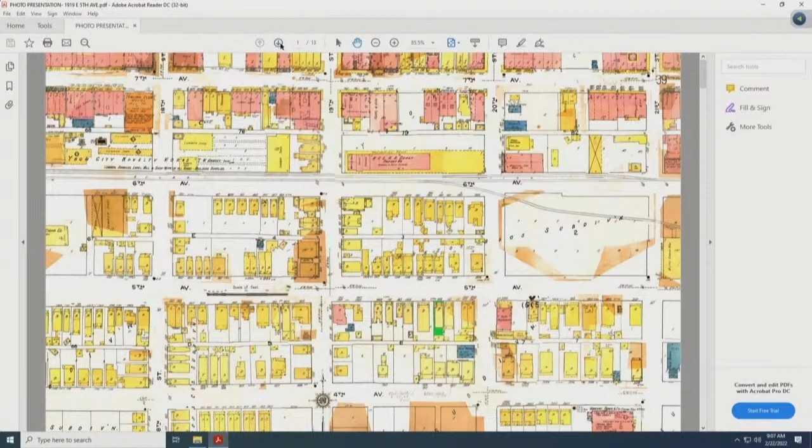This is the vicinity map showing the area in question. It's speckled through with contributing structures, non-contributing structures, and vacant parcels. This is the property in question, and to the west they have a tract of land that will be developed shortly.

This is looking from above. As I indicated, there are some vacant parcels to the west. This is the property in question, facing Fifth Avenue between 19th and 20th Street, with the alley that runs east and west behind the subject site.

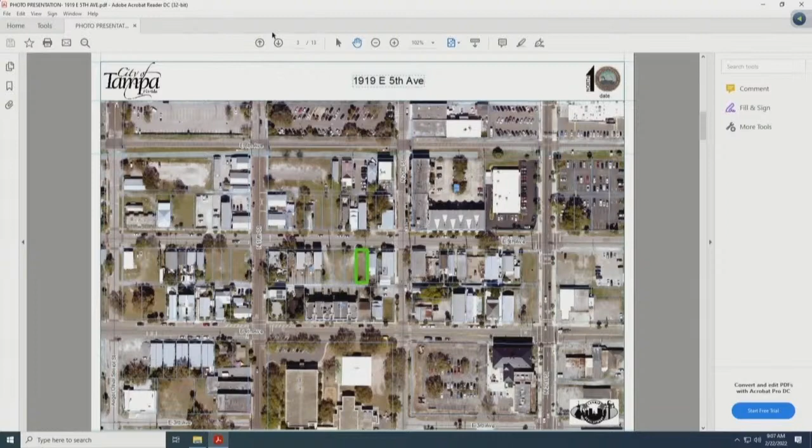This is looking back at the parcel itself. To the east you have this contributing structure. We use this as a reference point for setback from the property line, visually from the back of the sidewalk, and then elevation from grade as well.

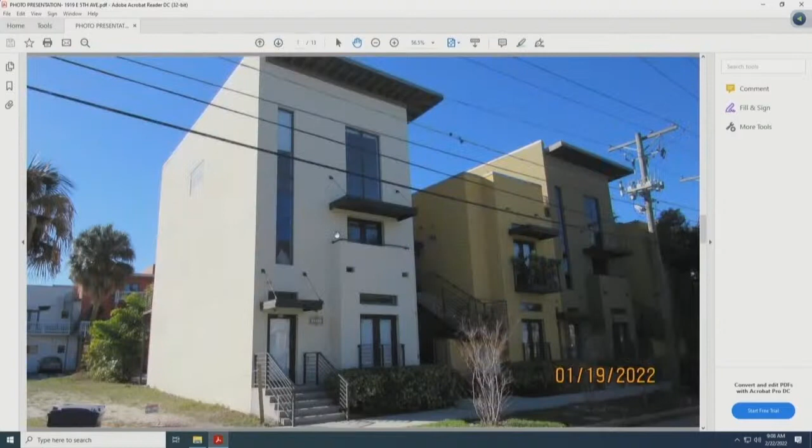This is just showing the subject site and the raw land. This is looking to the west, some new construction that's come in front of this board and has been approved. Look at the volume here and the massing, and the setback and elevation from grade as well as a reference point.

This is looking at a street shot. There's some parallel parking to ease some of the parking challenges in this urban environment. And turning around looking down Fifth, this is to the west, down Fifth Avenue towards 19th Street.

Directly across the street, and this is across the street as well. You have some non-contributing structures, this one here and this one here, and this will be your last case you're going to see today, but this was new construction behind this tree. And this is a period home, contributing. Once again, we'll use this for setback and elevation from grade as the project moves forward.

This is looking at the condition of the alley, towards the east and towards the west. That concludes the photo presentation.

At this time, the agent and the owners could approach the podium and begin their presentation.

Thank you. Good morning. My name is Joseph Ferraro. This is my girlfriend, Mackenzie McNamara. We are the owners of the lot at 1919 East Fifth Avenue. Frank Borgano is our agent. We're going to go ahead and present our plans. Mackenzie's going to do most of the talking—she's the most charming out of the three of us, so go ahead, Mackenzie. Okay.

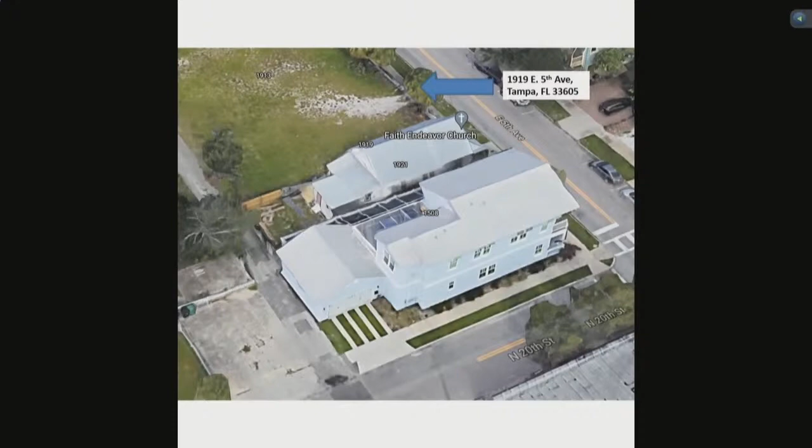Next we'll go to the site plans. So Frank, I'll let you talk. Well, this one just pretty much shows the lot line with drainage. So we will be addressing drainage issues when we amass the construction drawings.

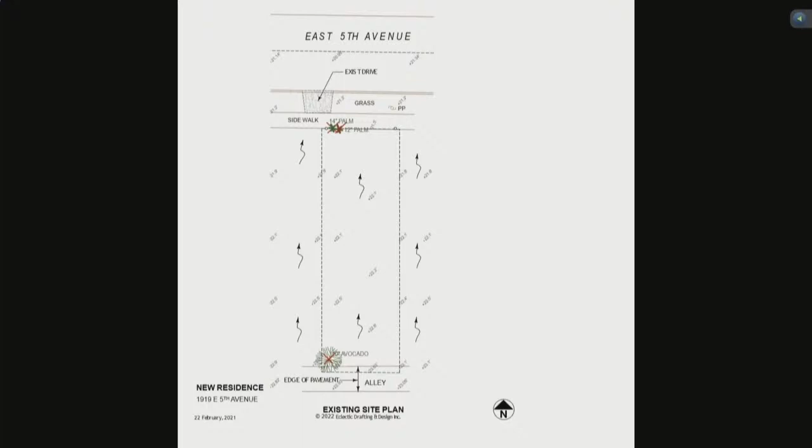This is the actual plot showing the house, and we have 2 feet from each—the body of the house is 2 feet from the lot line, and we have a 1-foot overhang. See the 2-car garage; behind the garage there will be a cement slab.

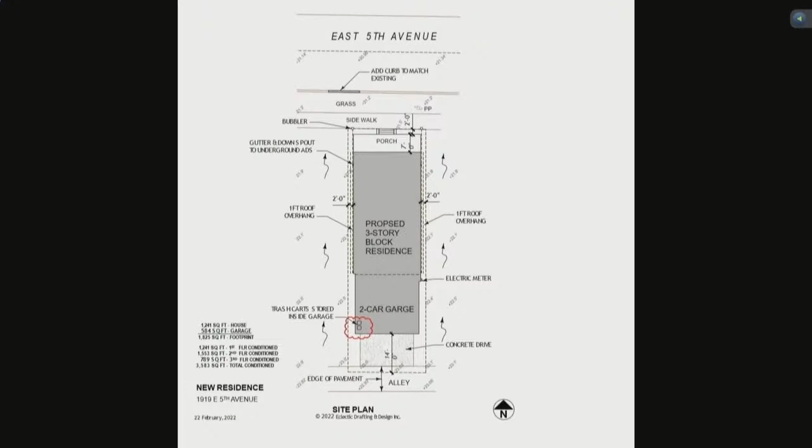This is Chris's house, on the corner, which I'm going to call the Wojewicz house. We were also the general contractors on that project. You'll see when we get to the elevation of that house, from an architectural standpoint, we're going to mimic that house.

Block construction, hardy board siding, same windows, same trim, same roof, same fascia, same open eaves, same exact front porch, all the dimensions the same, exactly the same overhang and dimensions from the lot. So we're not trying to create something different. We're going to mimic all of that because we already know that's been approved by you guys in the past.

This is back to our house, so now we're back to the house in question here. This is just to show you, once again, the interior. I know that's not really what's up for questioning here, but just as an example.

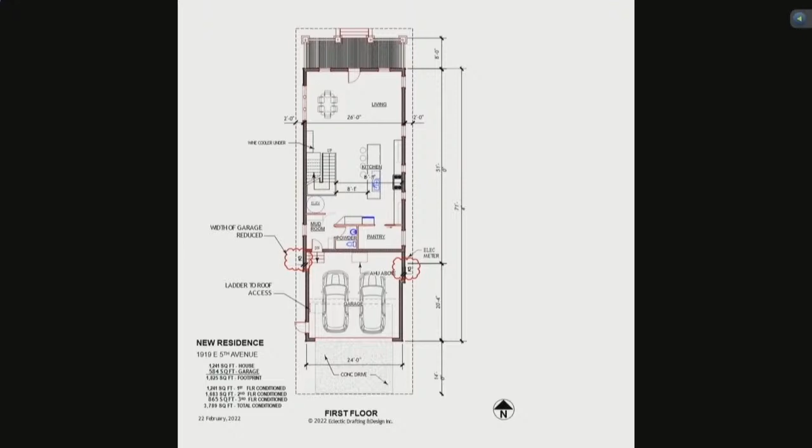One of the biggest concerns, or questions that were posed, were in regards to massing. We had basically a very, very long structure. We tried to, from an aesthetic standpoint, minimize that look, change that look. So we basically shrunk the garage in so that you didn't have such a long look going all the way down.

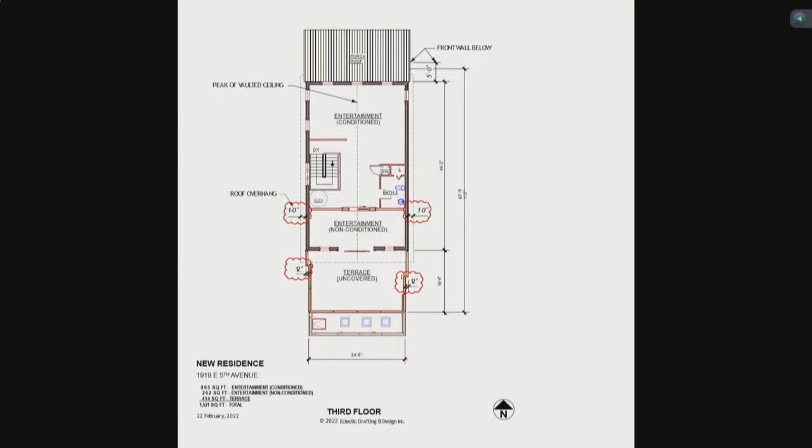This is the third, same thing in regards to massing. It is a 3-story structure. When you looked at it from the front, you basically saw a very large 3-story structure, straight up. So with the help of Ron, we came up with an idea to do 1st story, 2nd story, and then bring the 3rd story in 5 feet so you didn't have that elongated look in the front.

And here you can see, I better look at that, see how that front is actually pushed in 5 feet.

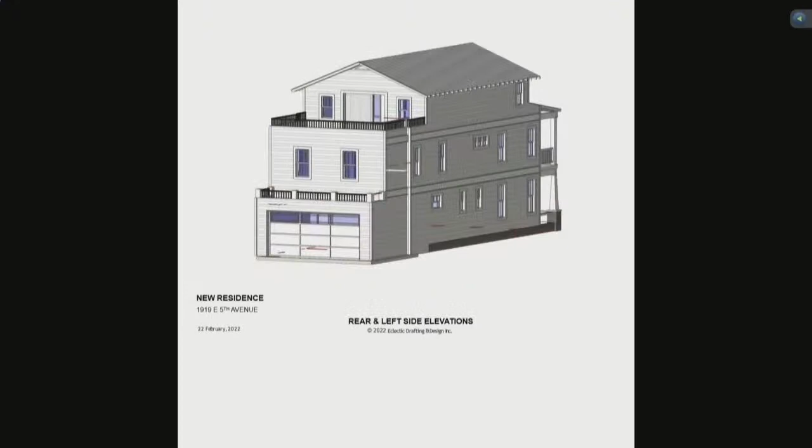Another look, this is from the rear, and you can see where the back end we brought in to give it a different look.

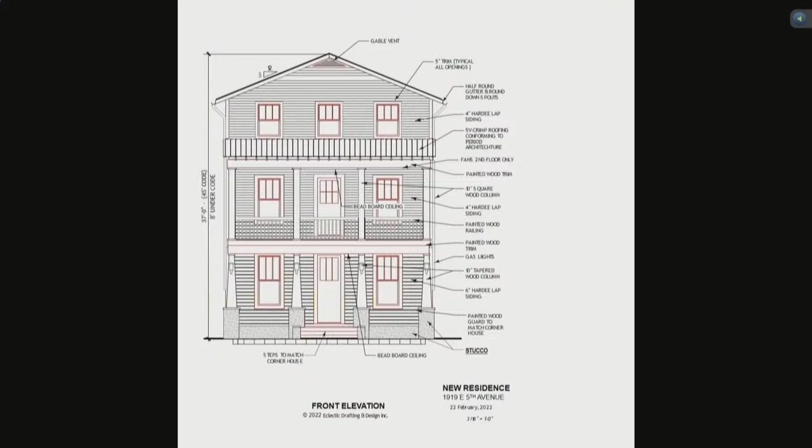And this gives you a side view, and you can see where we've tried to cut it up a little, basically, so you didn't have such a massive, unaesthetically looking building.

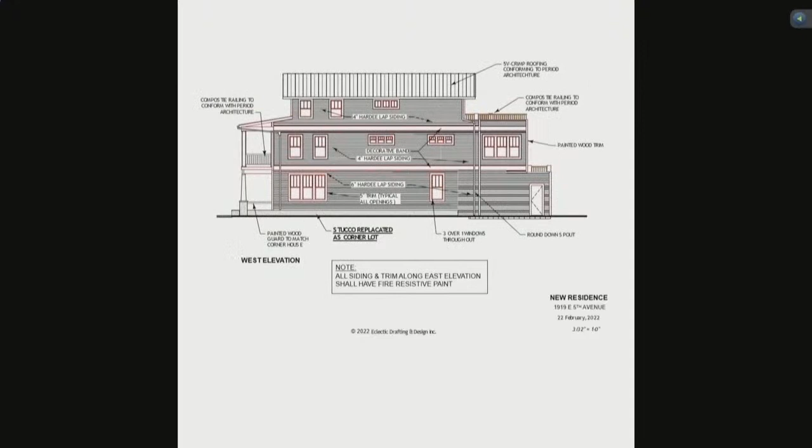Same thing, other side. This is the rear. And you can see the construction here.

Now, we know we're all the way to the zero lot line, and we know that one day the church next door will probably be gone and there will be another house. So we have a construction that we tried to make as fireproof as possible. We've got block, we've got Hardee board siding, we're going to be using fire retardant paint, same that we use in the Wojciech's house. So we tried to address that issue as well.

This shows you the front and how we, once again, brought the front in 5 feet to address the massing issue.

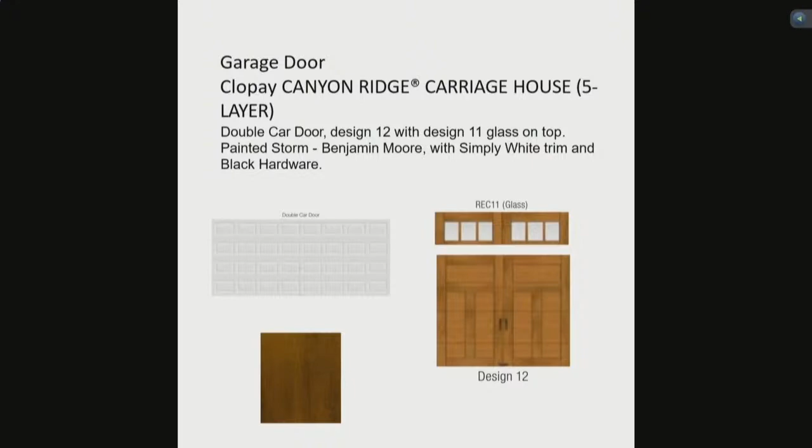Does that conclude your presentation? Yes. Okay, Mr. Vila? Good morning, Commissioners. Ron Vila, staff with Historic Preservation.

Staff's finding is that the application submitted on the 29th of January was inconsistent with the Ybor City Design Guidelines. Initially, when Joe and his team came forward, we looked at the massing—the vernacular they chose, more of a craftsman style, leads to a 2-story volume.

He added a third story there, so we talked about setting that front facade third story back. Initially, it was all in the same plane. The plans I reviewed had a 1-foot setback, and then this morning—this is the first time I saw it too—they pushed it back, I believe, 5 feet. So they're working with us to break that massing down.

So from the street perspective, the volume you engage with is more of a 2-story. Right now there's raw land to the west; we have some applications coming forward where empty parcels will be built up, so the view from the side will be somewhat obscured in the future. But they are working to break down the massing. Our main concern, why they received the inconsistent review, was because of the massing being in the same plane. That has been addressed this morning.

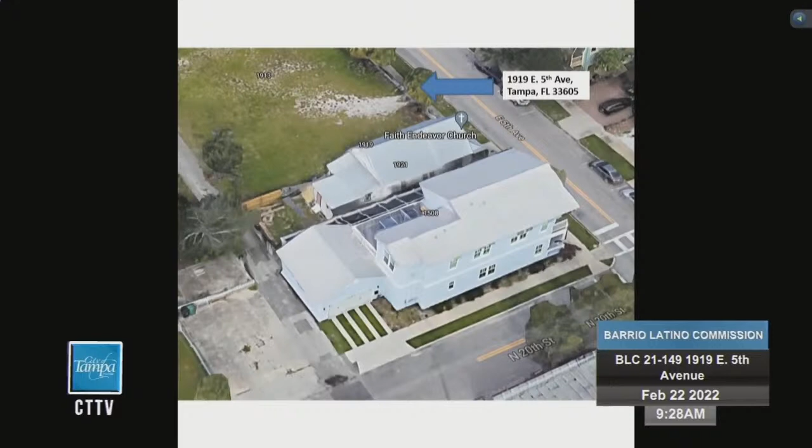You want the actual photos, not the plan, correct? Yeah, so since you're mimicking the materials, we can just go through the existing house and talk through all the materials. Okay, there. Oh, sorry. We'll get there.

Okay, so let's start from the top, work our way down. The top, the roof portion, is a metal 5V-crimp roof. Then as we work our way down, let's start with the actual skeleton. It's a block structure that has been furred out, and then we've added Hardee board siding, smooth.

The trim on the windows is a 1x6 trim, and we made it consistent with what the neighborhood bore back in the day. Open eaves, once again consistent with the neighborhood as it bore back in the day.

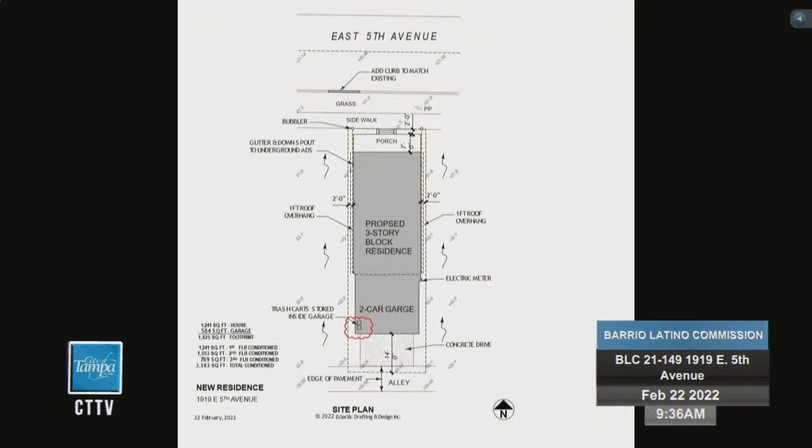And what's your finished floor height? Those are staff comments that you discussed with them in the future. I don't see any information on that. Well, on this particular drawing, it doesn't show. You're basically wanting the difference between the porch to the sidewalk, is that what you're asking? Yeah.

Yeah, so basically what you're saying is make sure we put that on the actual drawing. Well, I mean, you have a nice presentation, but there's a lot of specific information that we're looking for in order to position the house appropriately on the site, and that documentation is lacking. You've shown us an adjacent project and say it's going to match exactly, but we don't know what that really means. So I get the design intent of what you're trying to do, but we're making a lot of assumptions here, you're asking for approval from this board on assumptions and pictures that it's going to look like this, but we need to know what that is.

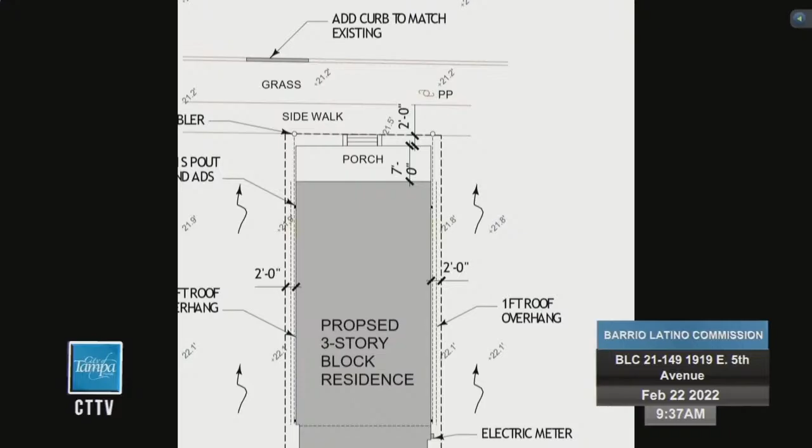Hang on, Chris's house should have it. What's your finished floor height, do we know what it is? Can you check? Hard to see, I think it says 12 inches.

Sorry, we're trying to pull up the plans from the house in the corner. I mean, on our monitor, we can see the Voidovich house, so it's got, I can see a finished floor elevation. Are you entering into the record that you're going to match that finished floor elevation? But that's only the porch shown there, and I don't know if I can make out any setback. So these are important details that we're trying to get a better handle on here.

So, no. I can't, I don't want to just make up a figure.

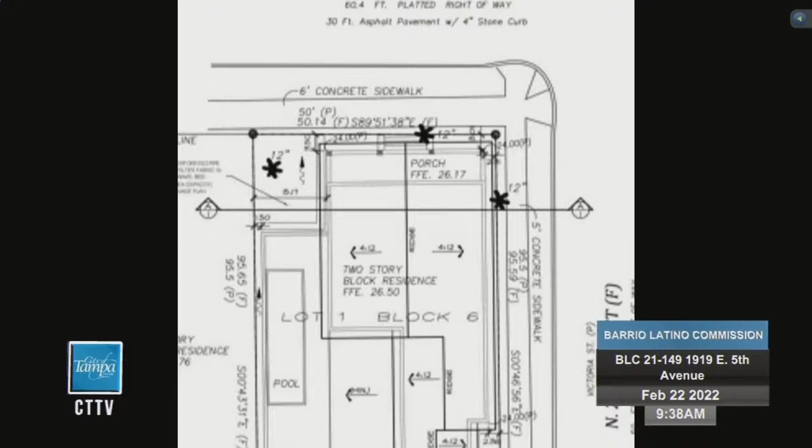I can take an educated assumption here that basically, we're 7 foot away on the porch, or the porch is 7 foot. Then we have the stairway, so it looks like from the property line there's 2 feet sidewalk. So are you wanting from the sidewalk, or are you wanting?

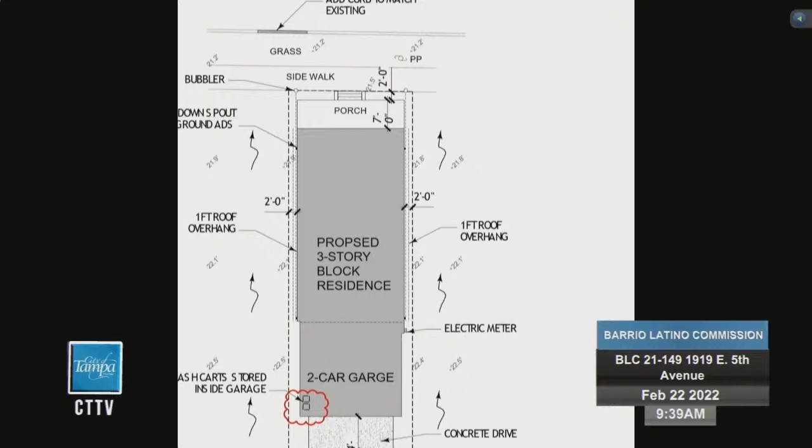I need to know what the historic precedent is for how you're positioning your house on the site. Let me see if there's any other ones. So if there's other historic homes, you're trying to mimic a historic home, you need to know how far that is from the street. And usually, and I think that goes back to staff comments.

We made it very simple. We just mimicked the other house that we did. Ron, is that enough information for you, or?

In the past, that information was presented to staff. They show the historic fabric within that block. They have a structure that's a contributing structure to the east. It's very easy to provide that information to us. And then they do have the house that they continue to reference.

It's not a historic home, but that pattern was established, and the historic pattern was established, and then in the discussion to approve that structure, the setback was consistent. Then across the street, there is some historic fabric as well. It is reduced. As I tried to allude, the zoning is YC7, which is 0, but the historic pattern would take precedent over that. So those numbers should be delegated or presented to staff so we could have whatever that averaging is. They should be in line with the fabric established in the immediate vicinity.

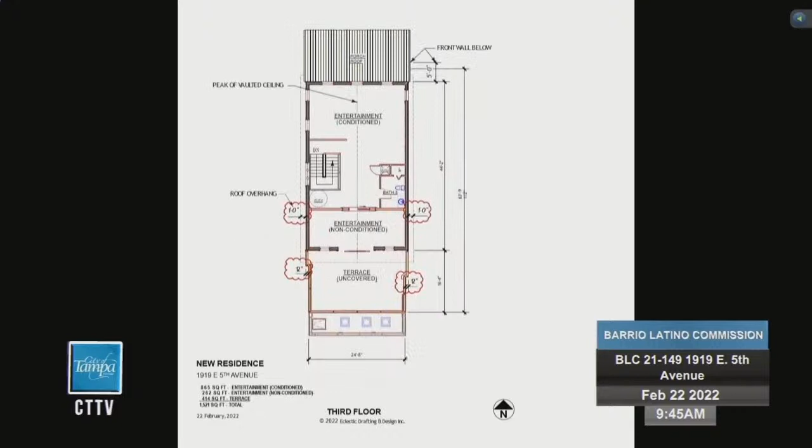Yeah, you know, that kind of bothers me. You're making a slight move there and they're uneven. You'll have houses on both sides of you, but I don't understand the justification for that. Is that to try to get a little more setback back there, or what's the reason it's uneven? It's because of the second floor, how the walls work for a bathroom and for a laundry room.

Pull up the second floor picture. We don't have it in the presentation. I could go into my email and get the second floor if that helps. I mean, why even make that move? If you're just setting back that wall, is it because you're concerned about the setbacks and the side yard setbacks, or is it purely a space issue?

Oh, no, that was a recommendation from Ron to move in the garage, shrinking that part. The reason why we did that was because when you looked from the side, we were advised that it would be better to kind of break it up, give it a little bit of a reveal from an architectural standpoint.

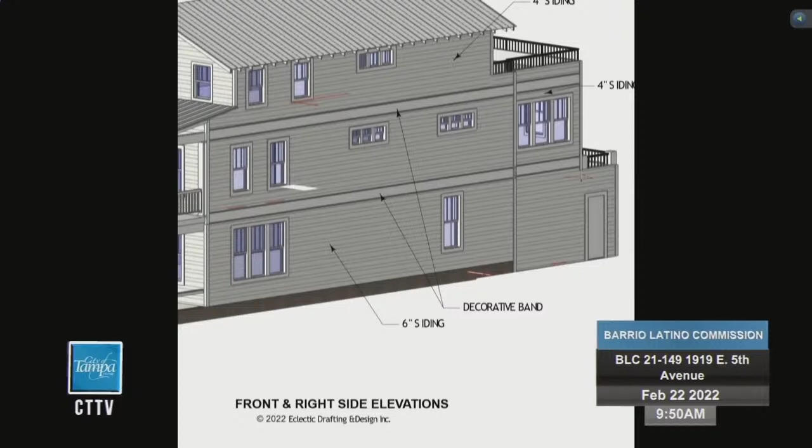Yeah, I guess it kind of, this part right here where it transitions to the garage, that break needs to happen right here. Because then you differentiate what the house is. I can't point up there, but your break line from the house to the garage needs to happen where the third story ends. That's a good transition right there.

It's like you're making that jog on the side, just puts it back 2 feet, 3 feet, whatever it is, where that really needs to happen at the end of the third story. Okay, so make sure I understand what you're saying. I think I do.

So what you would rather is that, in respect to the back, just to kick the third story out to where it is one definitive line, correct? Is that what you— Or bring that break back in under the third story. I don't think we can do that.

We can do the third floor though. Yeah, move the third. We can move the whole thing back? No, just this part? Yeah, yeah. We can take the back of it and just kick it back, whatever footage it is, 3 feet, 4 feet, whatever it is. So I see what you're saying, yeah.

Are you gonna take the whole third story and shift it back to that break line? No, you're just gonna take that back and shift it back, just elongate it.

Yeah, because I think you're looking at your two different forms, and you're asking us to consider the massing here, and it adds another form to the massing that I think we're trying to simplify and make a little bit more consistent.

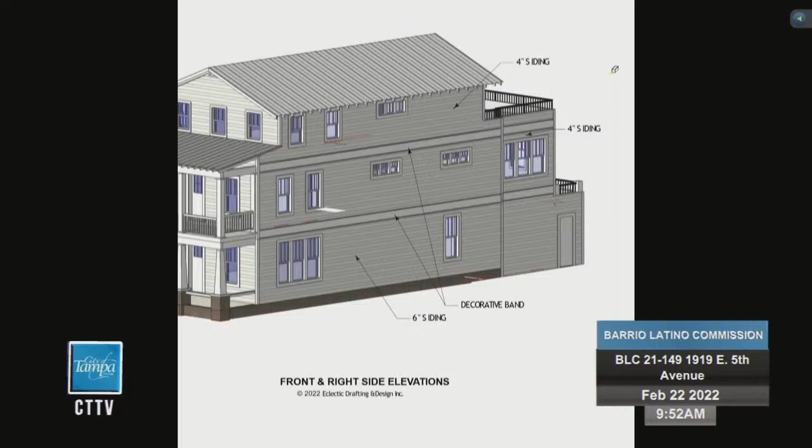I think the gesture of the 5 foot setback of the third floor—I think 5 foot's decent, it's better than the foot that they showed before. Maybe it should be another couple feet, but 5 feet, I think that's what you've talked with staff, so I think everything's good with that.

But if we can align that in your side yard setback, it does a number of things for you. It aligns your gutters, it brings all your trim back in, and it differentiates—you have your garage separate from the house, and then your screen porch or enclosed garden area, bring that back in. That might give you a little bit more room for your AC units there. So I think it's more about trying to make this a cohesive whole.

I agree. Thank you. I agree. Yeah.

Okay, can we go to the other view? I'm okay with the trim boards here for the sides. Mr. Vila, the garage doors—I think the Voidovich house garage doors have the decorative latches on it, which I think was kind of an issue. You don't typically see that in a historic district.

They've shown us some cut sheets of their proposed garage doors. Is there a staff opinion on the garage doors? The direction of the board in the past is that the door is simplified off the alley and that it would have some kind of glazing to break it up.

The transition from the alley to the vehicular entrance was reviewed by transportation, and the setback is consistent with the technical manual. I don't know if there's going to be any fencing, if they want to discuss fencing coming off the alley, or if that will be viewed. No fencing.

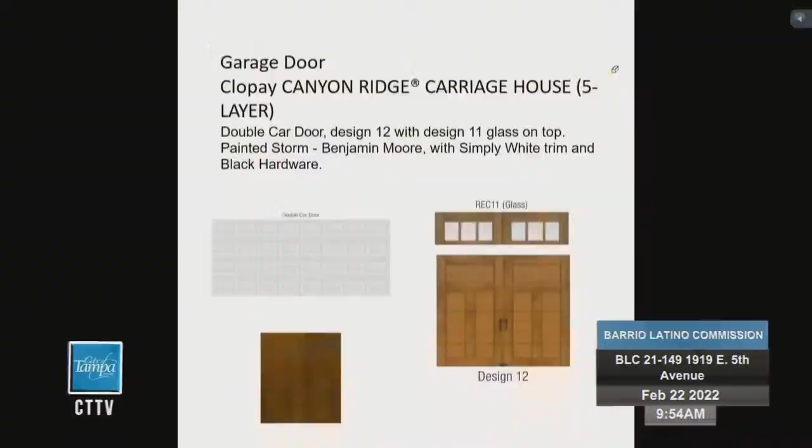It's all the way at the end. Sorry, okay. So this shows it's just a double car door, and it's going to be the same color, more the panelized one on the right, yes, with the windows at the top, smaller windows, as long as it's not a typical suburban type of garage door.

It's going to be in white. Yes, I believe so. So it'll be white as well.

Okay, could you go back a couple slides. I'm gonna go back to the plans. Okay, sorry, wish there was an easier way. Okay, yeah, wall sections.

What's your transition? You're gonna do stucco at the retaining wall, at the stem wall? So then that'll match your stucco on the front porch, your whole entry is all stucco. Okay, basically stem wall, fill, slab, and then can we go to the other section?

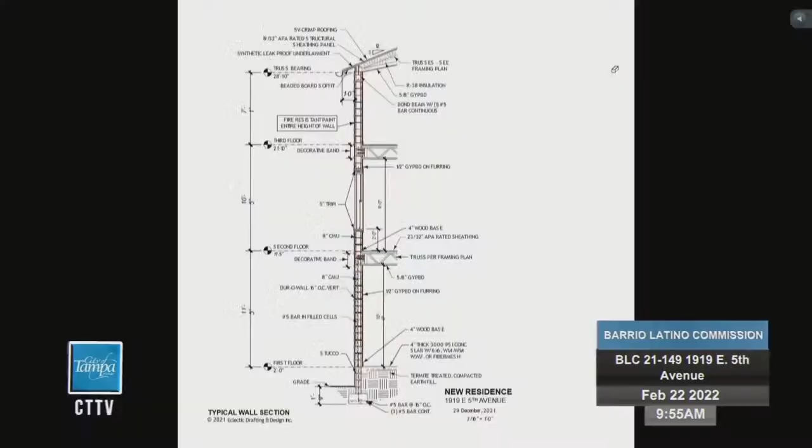So how are you gonna, I think I saw some detail on this where that decorative trim is gonna follow your finished floors, right? So what's your side treatment for this roofing? Maybe the side elevation or model may be a little bit better, I thought I saw. Is it, you're just gonna continue the cladding into there, trim out the sides?

Show me where he's pointing. I can't hear him. On the first floor? Nope, on the second to third floor roof, the shed roof up front. We are actually keeping that, we were proposing to keep this open, correct? Correct. Can you point to it with your mouse? I don't know if that works on this.

You're talking about the second story roof. The shed roof on the front. Right, over the porch. That's gonna be open? You're talking about the side? Yep, which is gonna be left open. Okay, yeah.

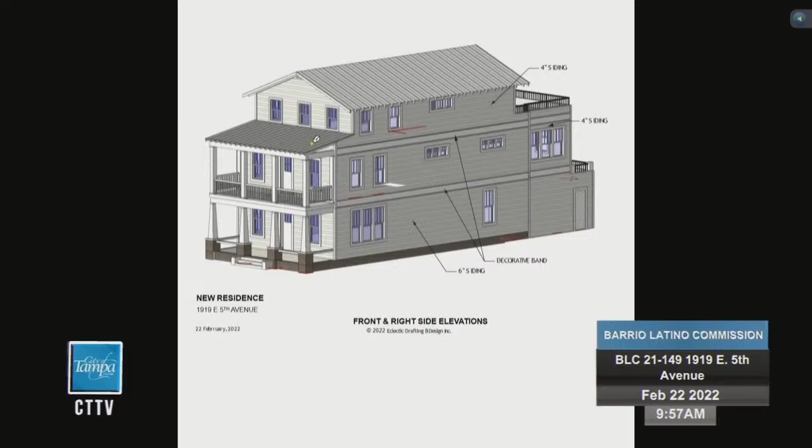Go back to your elevations for a second, I'll wrap this up. One more. So that, yeah, that kind of shows it as open, so you stop the Hardee trim there. Okay.

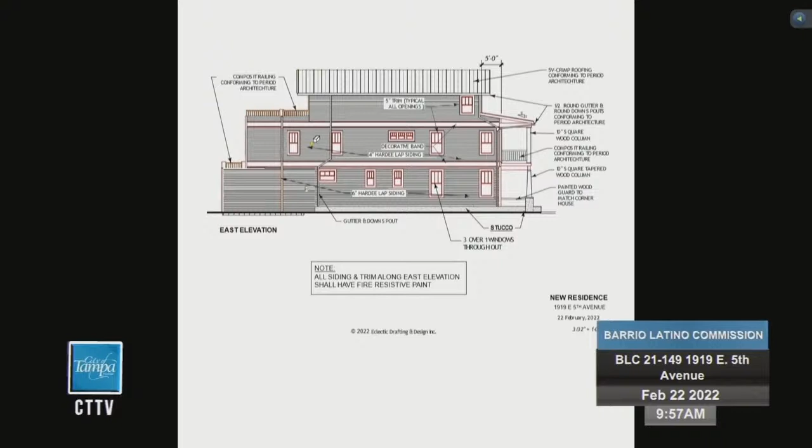Thank you. All right, you've got a few minutes before we close the public hearing. If you want to summarize, I think we've made some suggestions. If you're into some of the changes that we talked about, if you're open to that, but we're going to ask you for final confirmation of any changes to the project before a motion.

Wait, hold on, Ms. Welch, did you have any questions? No. Okay, okay.

So yes, we're open to all the changes. We're going to implement the changes. We actually like the change of moving the third story back. That's a great change for us. We're open to all of those.

Okay, any other comments? No, we're both very excited, we're in Ybor now. We appreciate the area currently as well as what it's gonna be. So we're both very excited. Thank you all for your time.

Great, okay, we're going to go ahead and close the public hearing. We can now discuss the case amongst ourselves. Mr. Perez?

Perez, can you please turn on your microphone? Thank you. I think my biggest concern is the front elevation and the three windows. They showed all these three-story with a loft on the top. I think they should try to do something similar, maybe just one big window in the center or something, try to mimic that, maybe lower it more, just to look like some of the samples they were showing, because just reading as a three-story, I don't know.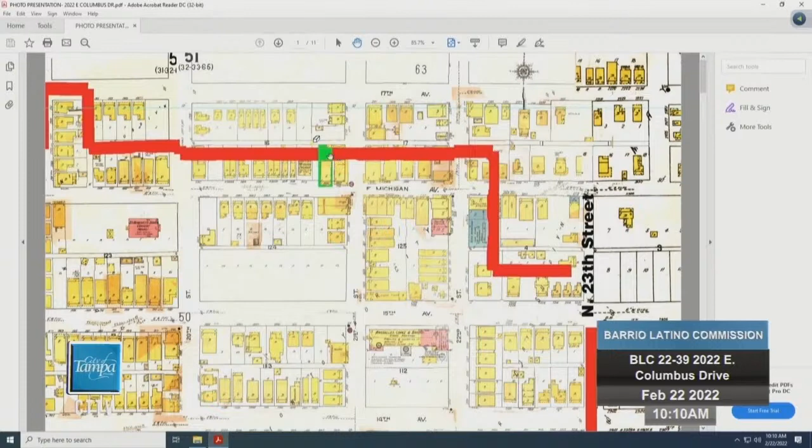This is our vicinity map, to get an understanding of the location within the general vicinity of Ybor City. The red perforated line is the boundary for Ybor City, and the property in question is here on Columbus Drive, once again between 20th Street and 21st Street. It's on the northeastern area of the vicinity.

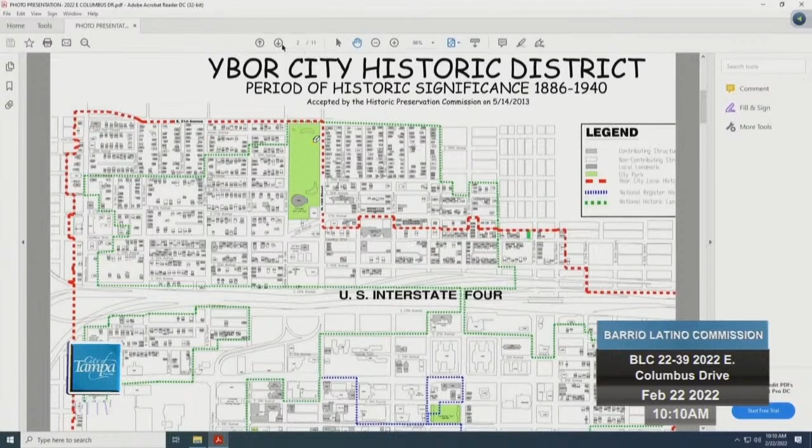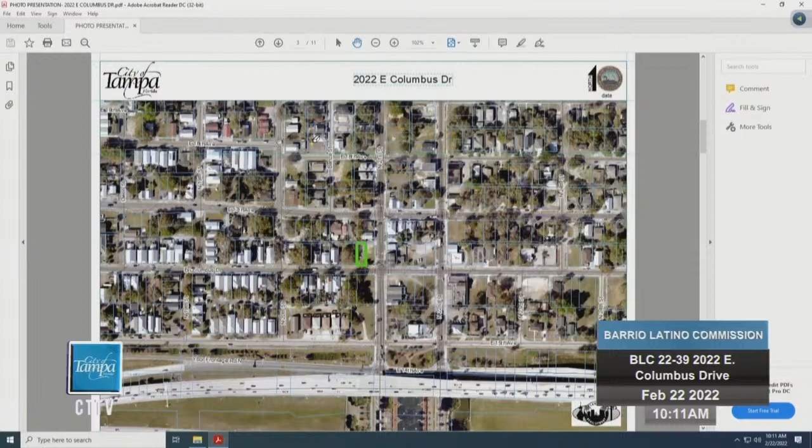This is an overhead shot showing the density that's there and some of the opportunities available for new construction with the open parcels. This is Columbus Drive, on the north side, where the alley will service the lot. Looking at the parcel, there are two sites we're going to look at this morning. One is this intermediate parcel, and then the next application will be this corner parcel. So we're focusing right here. You see the alley in the background, and you see Columbus in the foreground.

This is looking at the vacant parcel abutting to the west. Just getting familiar with Columbus Drive, this is a one-way street as well. This is looking to the east. And looking to the west, there's some opportunity here to do some parallel parking. Looking directly across the street, vacant parcel. This is to the south of Columbus Drive. This is looking down 21st Street, and you see the arrows pointing back into Ybor City.

This is that one-way street looking at the overpass as you get into Ybor. And this is the condition of the alley. There's a small paved area as you come off of 21st Street. The subject site is over here, the fence was kind of a reference point. This is abutting to the west, and the alley is not totally paved. You see the indication of where the fence lines are at, where the alley is. This has to be reworked; we're working with transportation now to get a final solution for the surface material.

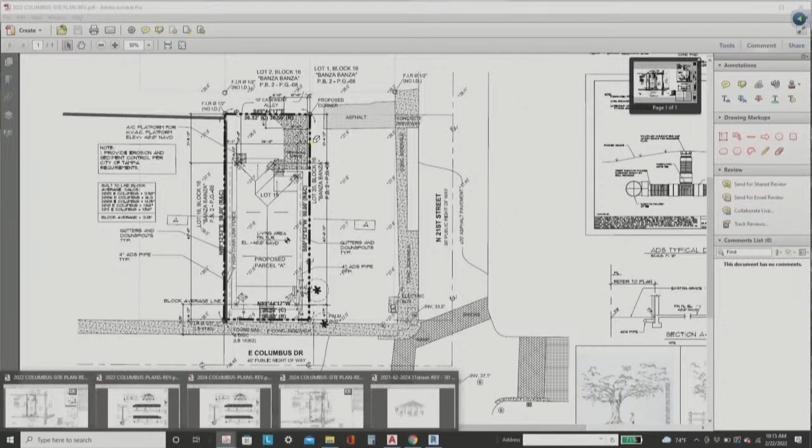Let's go back to our elevations for this house. It's a one-story structure, about 30 inches from finished grade. We're proposing to have stucco on this house, with some shaker siding on the end gables. The roof is gables throughout, and on the rear as well, the rear will be stucco.

We have separated the base from the building with a 6-inch stucco band all the way around, as you see. The columns will be proposing to have a stucco brick on them, painted, with some tapered columns. Also exposed rafters, and the roof will be asphalt shingles.

Around the windows, we are proposing to do stucco banding, similar to the period houses around there, which is 5-inch bands around the windows and then 6-inch on top with some trimming work with stucco.

Construction of the house will be all CMU with a stem wall. Again, the finished floor will be 30 inches above grade. Finish will be stucco, we'll have some exposed rafters, and the roof will be shingle again.

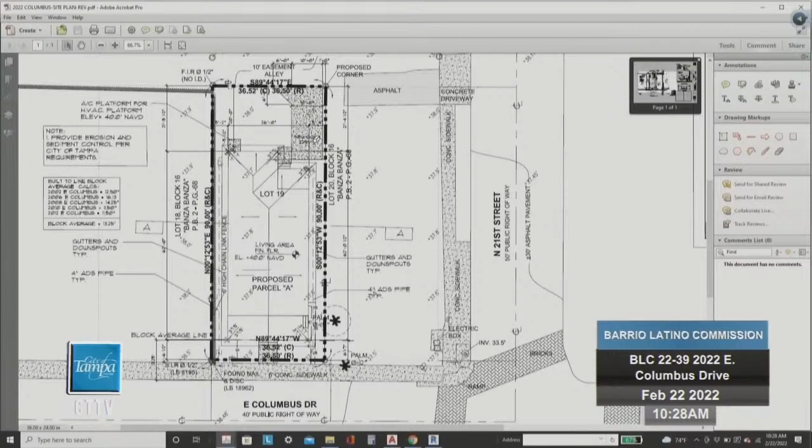Can you go back to the elevation? Actually, while on the sheet, gutters and downspouts, did we define those? We're not showing those on the elevations right now, but because we have to meet stormwater requirements and address capturing it all during permitting, we are planning to use gutters and downspouts with ADS pipes. The ADS pipes will be underground though. What are you going to show on the exterior of the house? Is it like a half round, or are you going to do a typical K-style?

Typical K-style. Okay, Ron, that's probably okay for this area, right? With the exposed rafter tails, the half-round gutters are much more sensitive, so that character-defining feature reads down the side of the house. So I would investigate putting the half-round gutters. Okay, half-round gutters will be good.

If we can move to the elevations. Half-round gutters go into round downspouts, and that'll be easier to tie into your ADS as well. Correct.

So on the front elevation, we're gonna get rid of the stucco brick, right? Right, we're getting rid of that, so we're just gonna paint that a different color, trim color. I think that's a good improvement. The shaker siding, I'm not sure if that's a great application, or I'd almost rather just see flat stock Hardie board going across. But you were also talking about adding a gable vent there, which I think is a nice detail. You've already got the brackets in there, but they get kind of lost in the drawing, so I think a little gable vent and maybe some Hardie board trim, just flat stock, would look a little bit nicer, and same thing for the rear elevation.

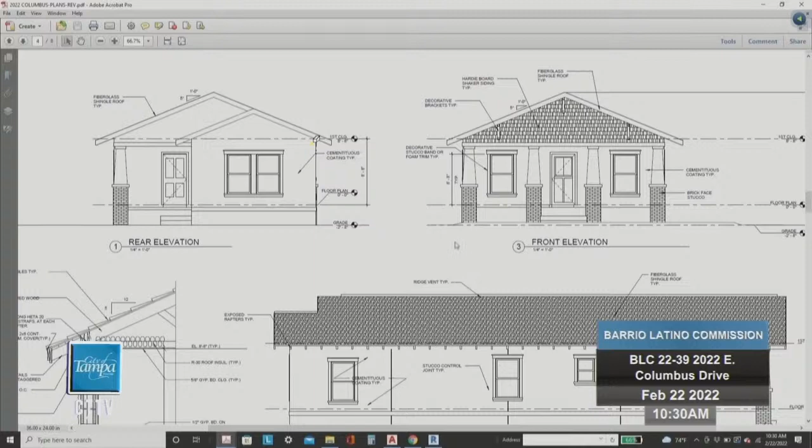So no stucco there, materials, gables, wood clad windows, great. And I think this is a nice little project. I think that it's appropriate for the proportions and the overhangs and everything. The shingles, I'd say we need to work with staff to get that approved for a color that's apparent in the district, same with the hardware, lighting, finishes, shingles, stucco pattern as Rod alluded to. So all that kind of works with a staff approval. But besides that, I think this is a nice looking project. And the windows are laid out well. They're pretty, you know, simple layout, but it's well done.

Thank you. Hi, Mr. Chair.

Yes, sir, I do want to add a couple suggestions, just in understanding the project a little better after the presentation. This being affordable housing and obviously a priority for the mayor's goals, we do want to meet the design guidelines but still stay within economic constraints that are exacerbated with the current real estate market. I'd like a little flexibility to work with the applicants. I think the window they showed was very nice, but we have been approving all vinyl windows with historic dimensions, which would be a savings to them. We could redistribute the budgetary items to the gable ends or some of those additional materials we were talking about. I also think there's an opportunity to simplify that column on the rear porch to bring it into a more basic reference without having to be a full-blown pier and column detail. So as you're forming your motion, if you would allow the staff some latitude in those areas, I think we can improve the project aesthetically and still keep it within the budgetary constraints we have.

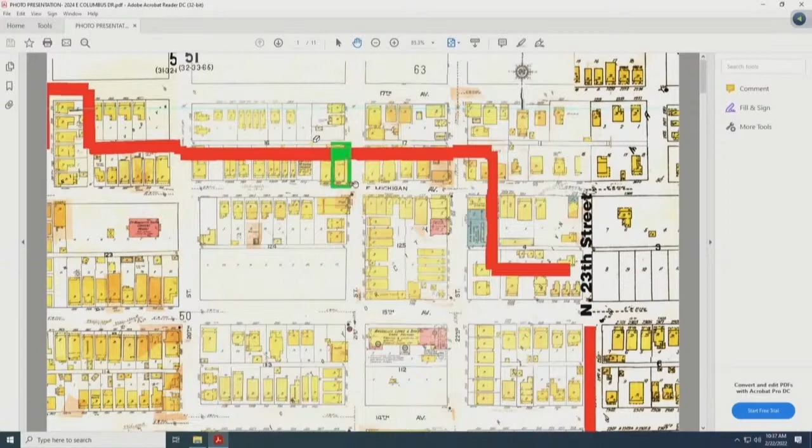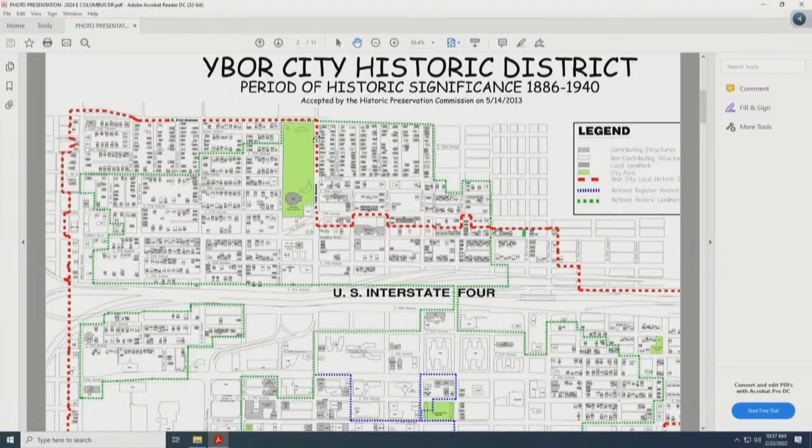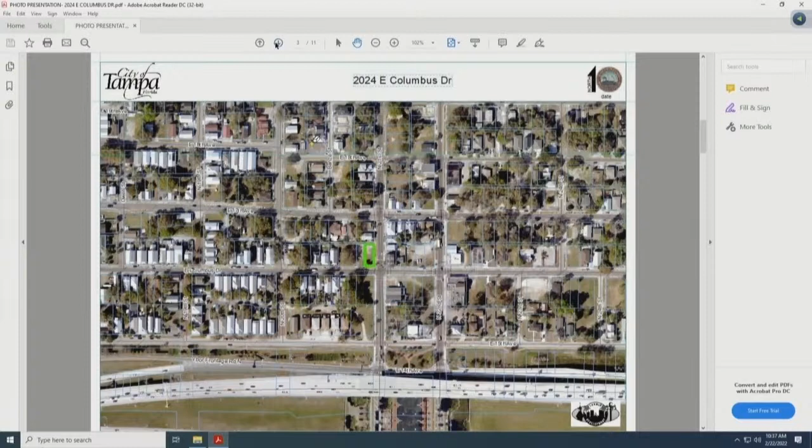And I just lost my screen. There it is. Moving to the vicinity map, once again, it's over here on the corner of 21st and Columbus. It does have the alley that will be accessed to meet City of Tampa code for the one-car requirement for parking within this urban environment. Looking from above, corner lot with the intersection of Columbus and 21st with the alley. Looking back, this is the subject site here. This is the lot that we just looked at.

Just going through the photo presentation again, it was consistent with what we saw already. This is just to refresh your memory. This is looking down Columbus Drive, looking to the east. This is Columbus Drive to the west.

Directly across the street, this is across 21st. You see some of the vernacular and the forms that are there. This is the entrance to the alley off of 21st, and the current condition of the alley. Just looking down 21st, this is looking to the north. This is the entrance to the alley that's here.

That concludes the photo presentation, and the applicant can address the board.

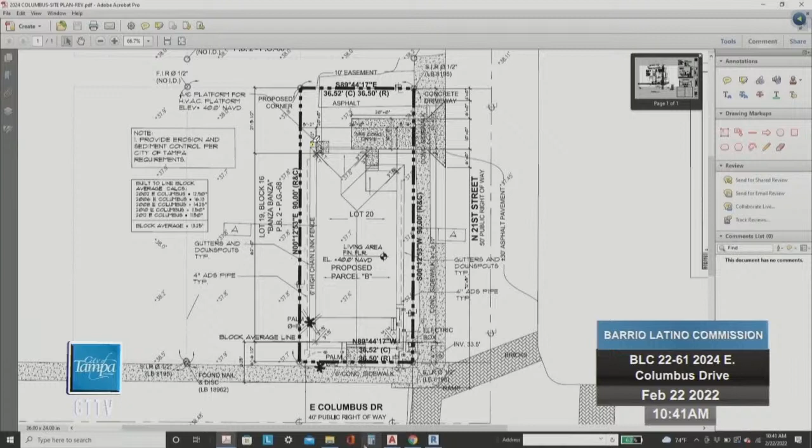We have our front porch to the front of the property, and the rear porch will be kind of in the corner on the east side of the property. That's our site. This house is very similar to the previous house, almost identical.

So we're going to add vents to the front and rear of the house, and add smooth hardy board siding instead of shaker siding. We're also thinking about removing the stucco brick and making that a different color, working with staff to make sure the colors we pick are appropriate.

Exposed rafter tails, asphalt shingles. We were thinking about using wood-clad windows, but if it allows, vinyl-clad windows would be better. We also have a stucco band going around the building to separate the base from the rest of the building, and we'll be using hardy board siding and hardy board trim around the windows instead of stucco bands.

Construction type will be a stem wall, 30 inches above grade, with stucco finish, exposed rafters, 2x8s on the fascia, and 2x6s on the rest of the rafter tails.

We're thinking about using a period-appropriate door, single pane on top with two panels below. Window type is a single hung window, 1 over 1, white, similar to surrounding properties with stucco finish. Similar finishes can be found at 2911 North 18th Street and 2801 North 16th Street, and a few more, but we simplified it to that. That concludes my presentation.

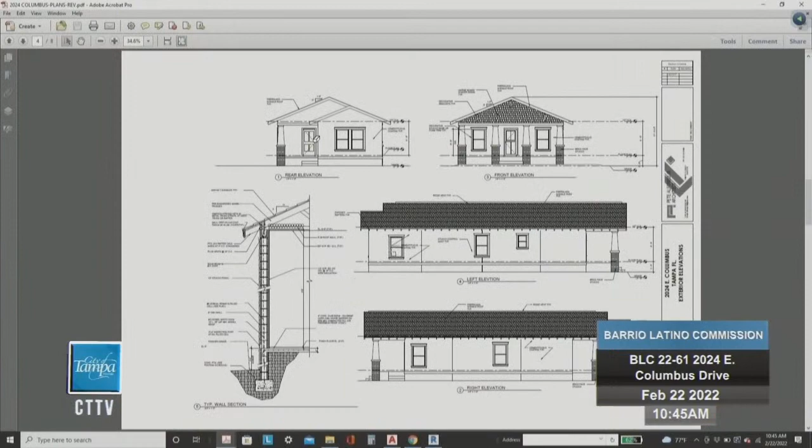I believe he's stating there is an additional window, let's see. On the other side? So if we flip the house, then you have the rear window, this window here, facing the street, and the balcony or back porch becomes more private for the resident since it'll be on the flip side. Right now that porch is actually facing the street. Gotcha, okay, so if we flip the house it'll definitely be more private for the resident. Good, I think that's a good point he made.

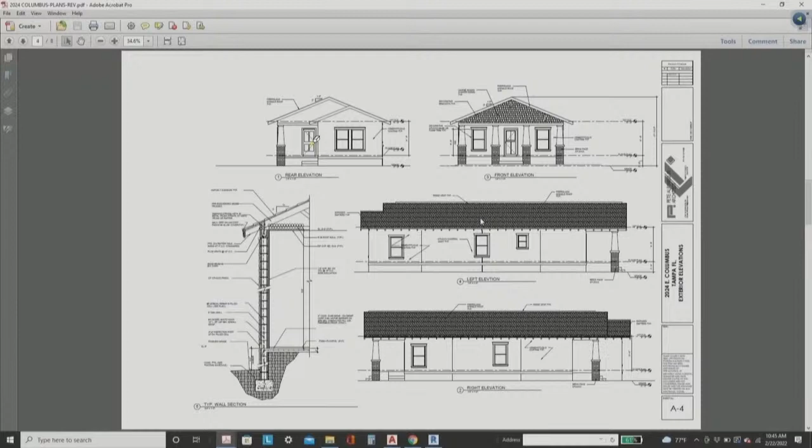Take that into account, absolutely. Thank you, you're welcome. Could you pull up the site plan again so we can look at how everything gets affected when things get flipped? Okay, so your driveway clears, I think that's a great comment to flip it. Besides that, the only difference between the houses is just the trim on the windows, right? This will be hardy trim as opposed to stucco banding. Right, and what we're gonna do is both houses will have the same kind of trim work around the windows instead of stucco around the windows. Okay, yep, different paint scheme.

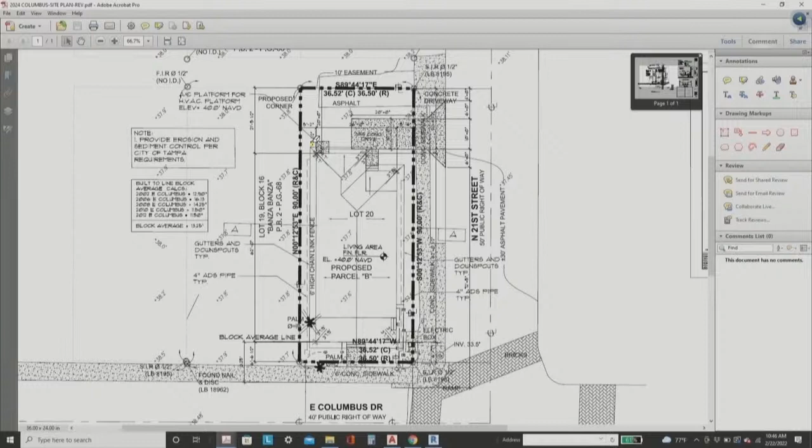Yeah, I was gonna ask if these lots are fenced, because it's almost like you kind of share your driveway. If you mirror that, you're sharing your driveways pretty close, getting around that fence post to bring the car in is kind of tricky, but on 21st people fly down that street, so I think it's a wise move. If you don't mirror them, I didn't know if you were doing cookie cutter plans, but if you mirror that and bring that driveway off the alley, I think it does a lot of things for you there - additional privacy, cuts down on people getting hit out there turning into their driveway. That makes sense - as it is they're gonna be turning into the alley, but you're right there, so the additional privacy I think is a good thing.

I don't have anything more than what we discussed last time. Okay, you have a few minutes if you wanna summarize anything after our discussion? I think everything you guys have mentioned are good pointers. We're gonna take that back seriously and make those updates to the drawings before we submit back for building permits, hopefully.

As far as the fence goes, is there a way we can allow the future residents to provide that fence? No, well, it'd have to come back - there's certain guidance for what the fence can look like within the district. I was more concerned about that for turning radius, but if there is a fence, I think it's something staff could handle if it's typical, but usually we'd like a wood fence there, white, no chain link. So, okay, yeah, no change please. Absolutely.

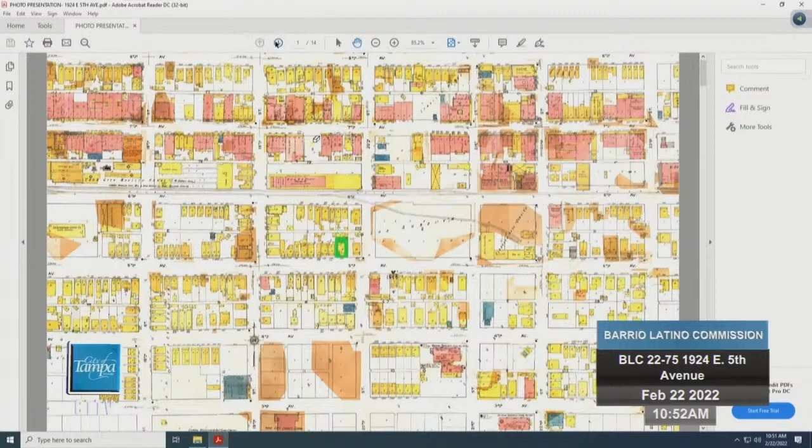Looking at the vicinity map, you see that there is some historic fabric there. The shaded areas indicate contributing structures on Fifth that abut both sides of the subject site. The clear area shows that this is a non-contributing structure.

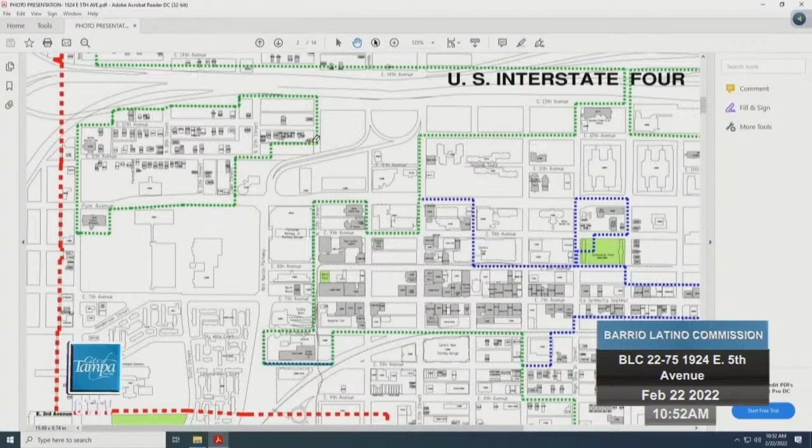Looking at the vicinity map from above, the structure was purposely shifted over when it was reviewed by the Barrio Latino Commission to allow some access. It has vehicular access off the front and off the alley that you'll see in the photos to come.

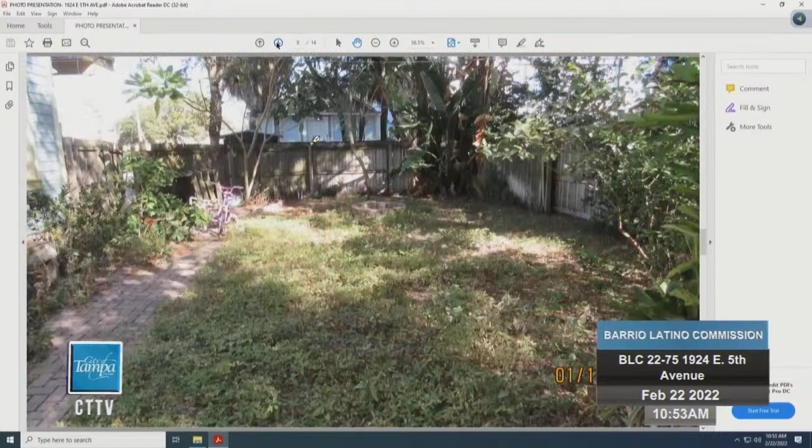This is internal behind the fenced-in area. The accessory structure will go approximately in this location here. And just looking from the back of the property, back at some of the additional parcel that they have.

The agent will address the board at this time. My name is James Kenson. I'm the authorized agent for Corey Brown, the owner of the property. I'm also the design builder for this project, so I'll be able to answer any questions you have about the accessory structure. It's going to be a new construction project, so it will be a mono slab, 8 inches above grade.

Before you get started, sir, were you sworn in? Yes, I was. Okay, thanks.

So it was about 8 inches above grade. It's going to be a concrete block wall, engineered roof truss system. It's going to be a hardy board covering on the outside. It's going to be vinyl impact windows that meet Florida code. And I believe I have the site plan to start out with, I guess, if that's where we need to start.

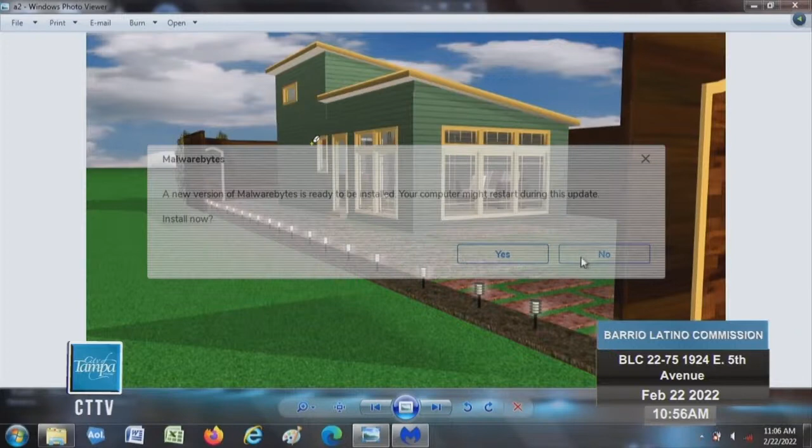What can I tell you about that? It's just going to be used as a guest house, and it does match, like I said, the existing structure and all the homes around it too. Everything's done by Florida code—impact doors and windows, full 200 amp service going into the unit, full plumbing and AC. So it's pretty much just a new construction, small home, going to be used as a guest house on the property.

Drive around and show your line runs as well. Yep, so I'll show you some different ones.

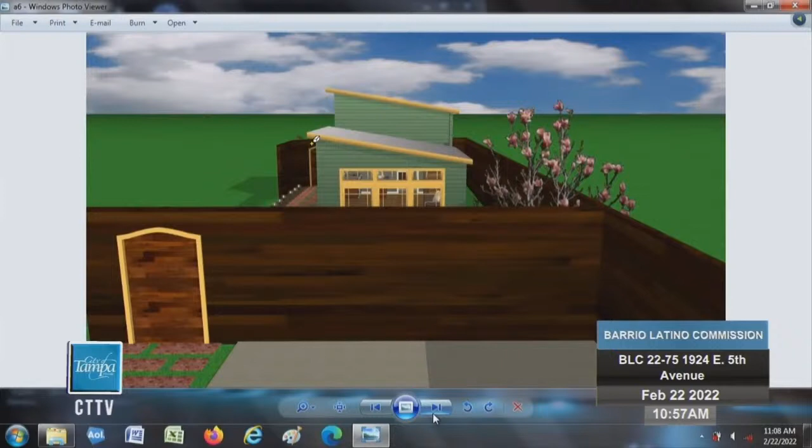So this is just the back side that would be facing the property on the east side, so you can see what the view would be that they would be looking at. This is the side from Fifth Ave, as I was explaining in the first picture, that's actually which will be seen from the street. The first part is 10 feet going down to an 8 foot. The second level is 14 feet going down to 10, giving the 2:12 pitch on both sides. The second side is going to be a loft, and that's why that's higher like that.

We're using the same type of front door as on the primary house to match the same look that we have. And then we're still using impact doors and windows all the way around.

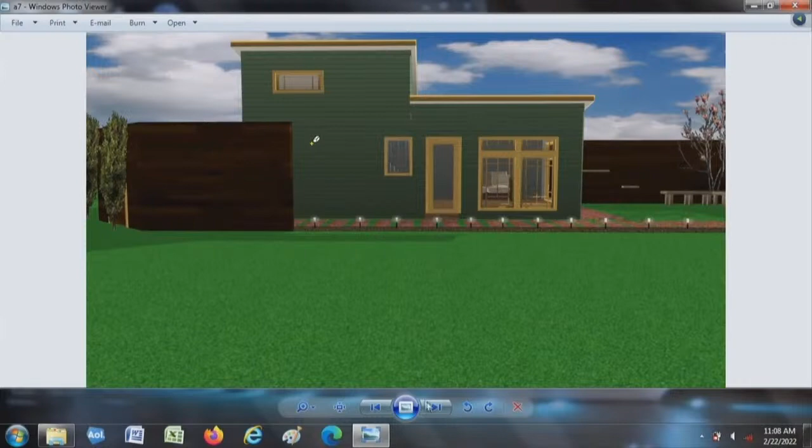This is the view from the alley side. So if you were to drive in from the alley side, this is going to be the view that you would see from that side. No windows on the back side because the bathroom and the loft are using that back wall. But everything else has tried to get a lot of light coming in there, especially with the skylight too. The skylight actually adds a lot of light into the loft.

Using that skylight too, it actually matches the existing homes around it. Some of the homes have skylights that give that same feature that exists in Ybor City. We're using a metal roof—I have pictures of that metal roof here too, from existing homes that we've done.

Is there a way to put that on there?

And go back to your HDMI. And then I have some pictures of actually what the inside would look like.

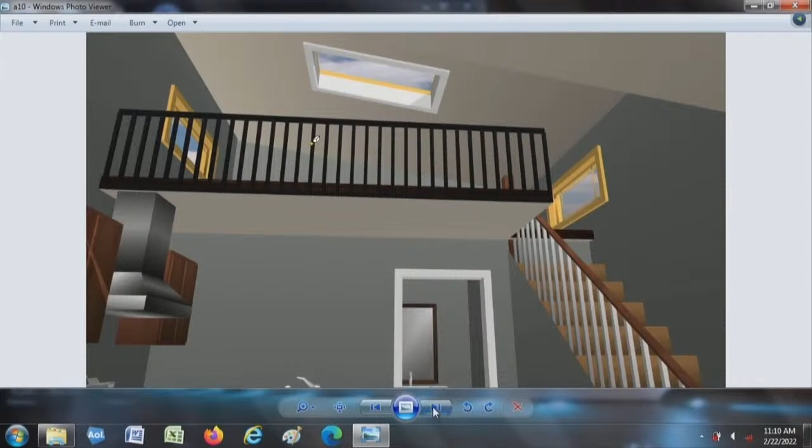So this right here is the loft. You can see the view from the loft with the skylight. This would be the look from the first floor up into the loft, with the staircase on the right side. This is the look as you'd be coming down the stairs. This is the view that you'd be looking at toward Fifth Ave and the primary home that exists.

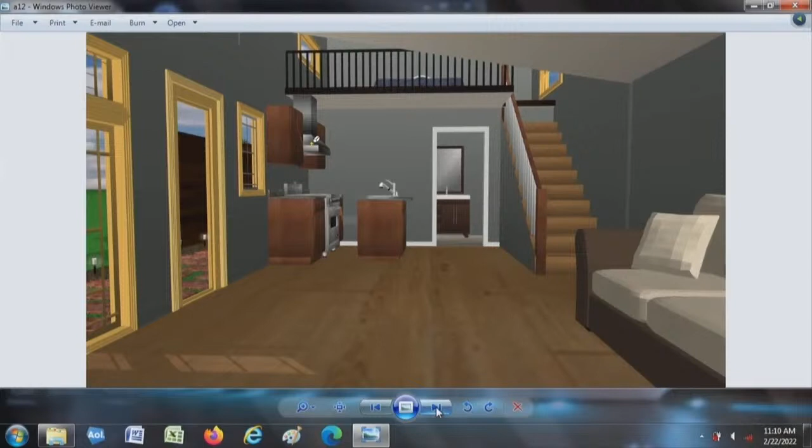This is a view from the back side, looking from Fifth Ave in, so you can kind of get an idea—living room, kitchen, bathroom, and then a small loft bedroom. Here's another view of the side, just another angle. This one here is probably the more important one.

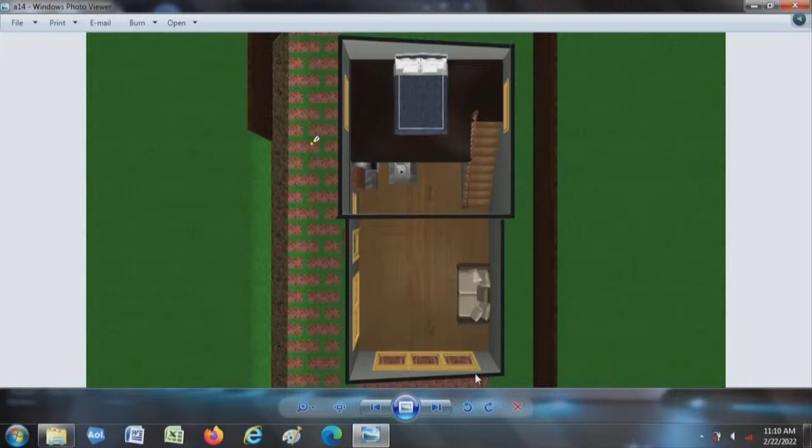So we just pulled the loft out, and you can see where the kitchen setup is, the bathroom setup. On the right there, that's going to be set up for the utility room as far as the air handler, water heater, and so forth. And then just the basic layout.

You can see the pathway on the side, right by the main primary structure, and the fence that's going to separate. We're using a 5-foot setback on the side and on the alley side to meet code, which I believe meets the fire structure requirements you guys are looking for between homes.

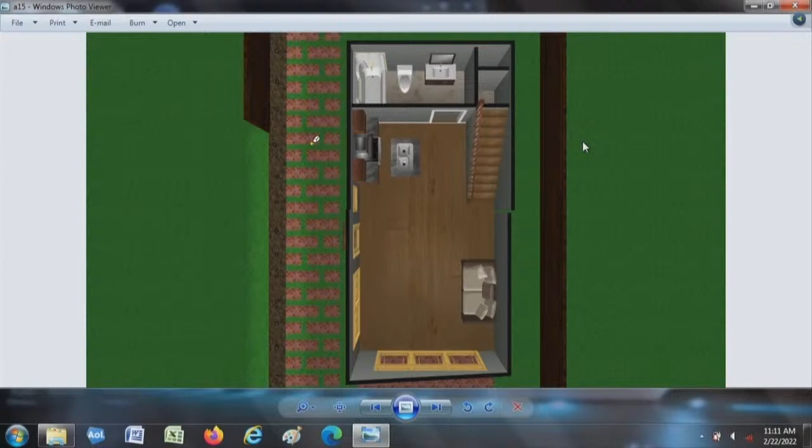And just back to the main picture of what the house will look like. You got light drawings too? Yes. Show those images as well.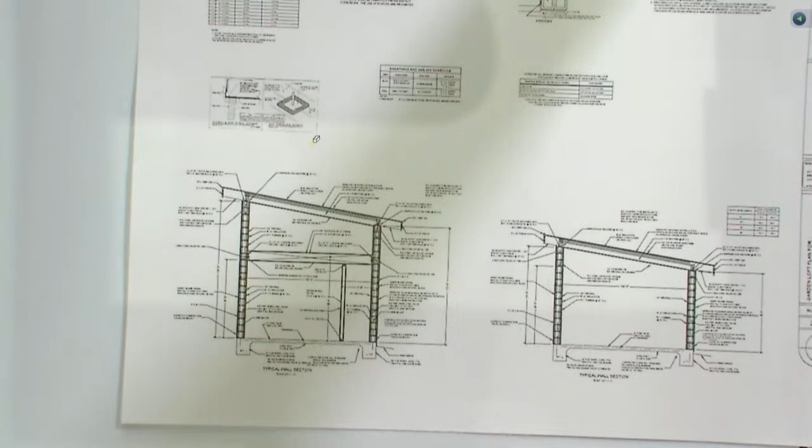Okay. This is the site plan.

So from our last conversation and meeting, one of the things that needed to be corrected was the direction showing north. Make that a little bit bigger—I know Rich is having a hard time seeing it. All right, there we go. Thank you, yeah, sure.

At the very top, on the original site plan, we didn't have the AC located on the back side of the house. But you can see what we did—we actually placed that on the back corner near the alley, sitting in the 5-foot space between the fence and the home.

And then here we actually have the northeast, or the direction of north, showing the orientation of where the house is placed. That wasn't on there either, which was requested to be put on the site plan.

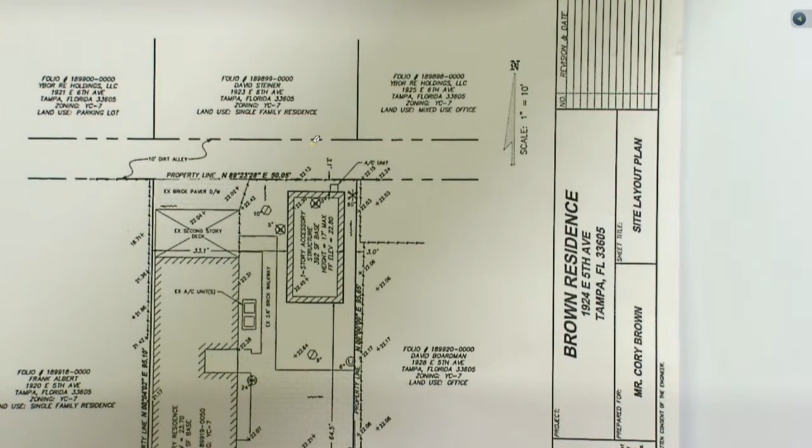There was also some work here in the front by the street. From what the owner was telling me and from our last meeting, there was one stone interfering with the way they would come in and out of the driveway. So the correction was to remove the stone, dig down, put the stone properly level with the street, and then put a new piece of concrete on the side there, so they wouldn't have to hit this piece of concrete coming out. This was a recommendation by you guys also, excuse me, Mr. Vila.

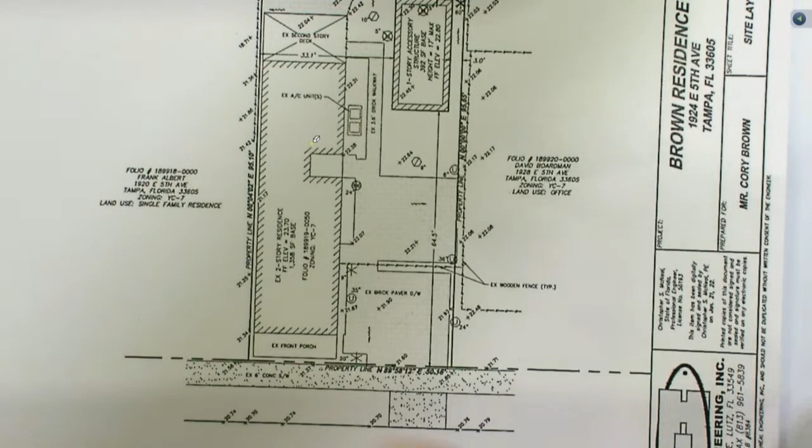Is that your presentation? Nope, I have one more too. So this right here is the elevations, and this shows how the elevations match what we plan to build—hardy board siding, the windows, the trim, the structural height of the building, the location of the air conditioner, and also the skylight that's in there. So I'm just going to move this around for you to see.

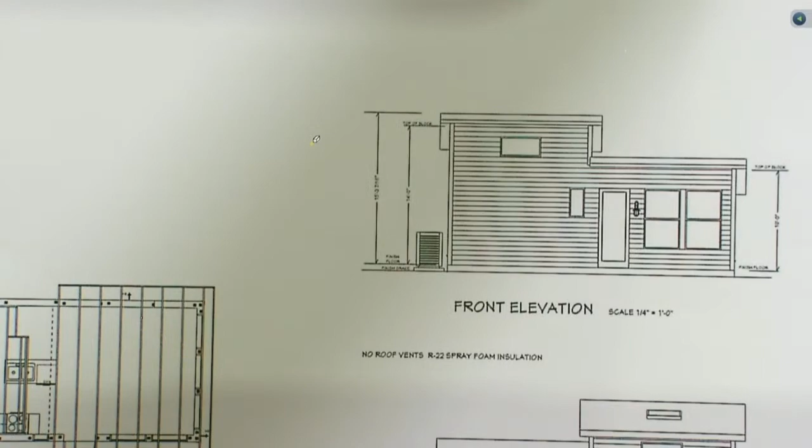There's that one, that's the back side. There's the front elevation. That's the right side. And there's the left side.

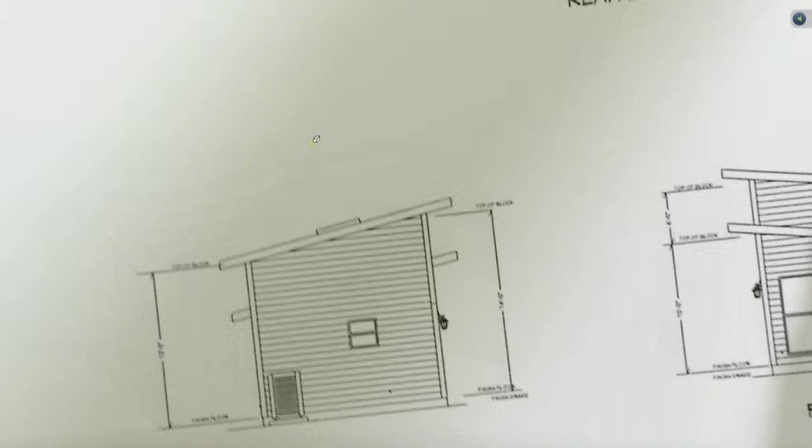Showing you. I'll hold that question. So this will conclude my presentation. I guess I'm open for questions.

Good morning, Commissioners. Ron Vila, staff with Historic Preservation. Staff's finding that this application is consistent with the Ybor City Design Guidelines. The conditions that were attached to our staff report are as follows.

To review the drawings and provide accuracy from the line drawings to the renderings. The renderings don't show, I know it's kind of more as an inspiration tool, but no corner boards. The line drawings show corner boards. I believe they showed a window on the line drawings on the rear elevation, and you had talked about that the rear elevation was not going to have any windows. So additional discussion on the accuracy of what was presented today.

So the granite curbing will be depressed in place so the city knows where our inventory is at, and in the event that it needs to be raised up and the curbing needs to be exposed, the curb is there. So he's just going to depress the curbing and modify the apron.

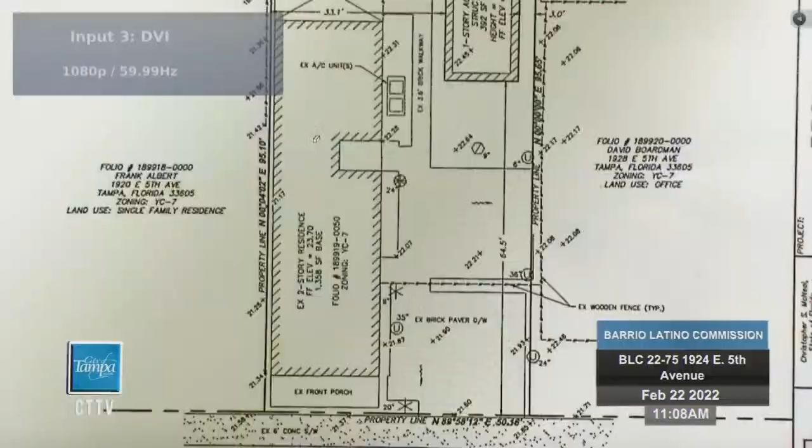Okay, so we have, this property is right up here in the top corner, top right corner, correct? Where the home, the new home will go, yes. Okay, so that's where the new home is gonna go.

And what is this street to the side? I'm confused at my orientation, so I'm trying to get it. Sure. You've got Fifth Avenue coming across, so the front of the primary home faces Fifth Avenue. Correct. All right, now this secondary home, guest house, is going to face what? So the primary home is facing Fifth Ave, so it's on Fifth Ave. Okay, the accessory structure is also going to be facing Fifth Ave, but in the back of the property on the alley side.

So when I walk down Fifth Avenue and I look into this area, I'm gonna see an entire backyard, and then I'm gonna see this structure on the back of the property. You might see some of it. The fence is so high, they have a privacy fence going around, so you probably won't see much of that from the street. You would actually have to walk up to the fence and kind of look over one of those to see in and what's going on in there.

Okay, that helps me. That was my biggest thing right now. Yeah, the privacy fence goes from the main structure to the neighboring property, all the way to the street, or I should say to the driveway. It actually extends to the street, but it branches at the driveway and goes back to the main structure. Okay. Yeah, because they've got, the current home, the primary home's got a little driveway here, and then there's that wooden fence separating the driveway.

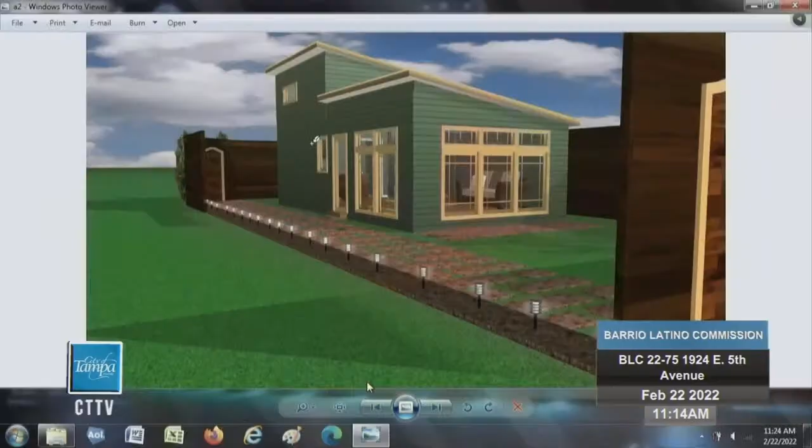Sure, tell me where you'd like to go. The existing house. Do you have imagery of it? There was one photo that was all black and dark.

They're going to match all the colors to that. Is there one that shows more of the roof? I'm just trying to figure out what it looks like. This would work, can't it? Okay, I think I have a picture that shows the degree - I backed up and took one. There's one in your packet here, a front and a rear.

But we face the home the way the roof is to match the existing one. So if you were looking back, the existing one would face the same direction, and the other would meet with just a separation of space between the homes.

That's it on my end, I don't have any more comments or questions. Okay, I noticed some inconsistencies between the renderings and the line drawings, the elevations.

It has to do with window placement, sizes, and proportions. I think the line drawings look more accurate. If you look at the renderings, the window next to the front door in the kitchen looks too big and not placed very well. I wanted to see if we could switch that, but your elevations show that window much smaller and placed more sensibly. Also, in the renderings, the upper windows in the loft are not centered within those walls, but your elevations have them centered. I think staff understands what the proportions are doing there, but I want to make sure we understand your intent.

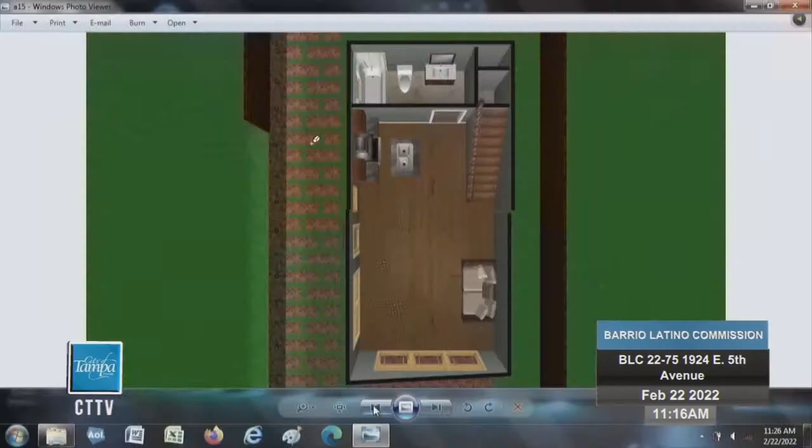So your upper level window in the back is not centered within that wall. That's accurate, that's more accurate. So that upper window is shifted to the left, not in the center? Right, it looks like the architect, when drawing these, moved it over too far. But this is where we wanted it, on the far side, to give the light a certain way in the loft. Moving it over too far wouldn't give us the light there, and it would be kind of where the overhang is, where the space is down below.

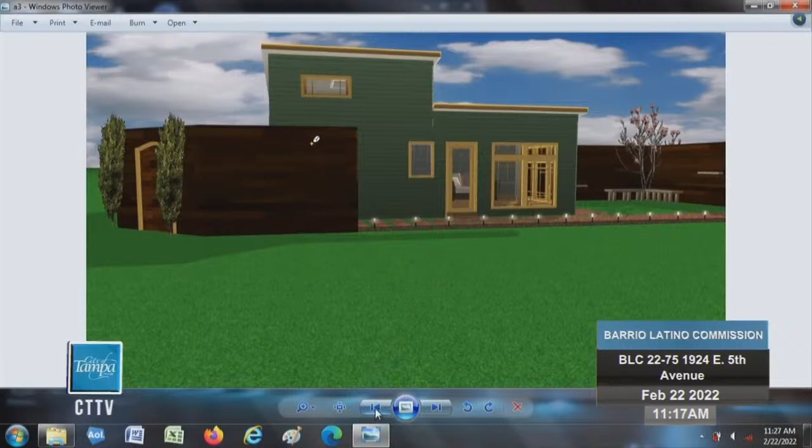You want to bring up your line drawing, your elevation? I don't know if you could put that on the Elmo. See, that's centered. The window to the left of the door is much smaller and more appropriately placed, whereas in the rendering it's too big. I think this placement's better, but I just want to understand.

Yeah, on the rendering too, it is made for that. The dimensions of that window are 18 inches by 2 feet. I have the window product here too, so you can see it if you wanted. So the window is there, and even though the drawing might make it look small, the actual size is 18 wide by 24 inches high, like a little view window, and that's a fixed window.

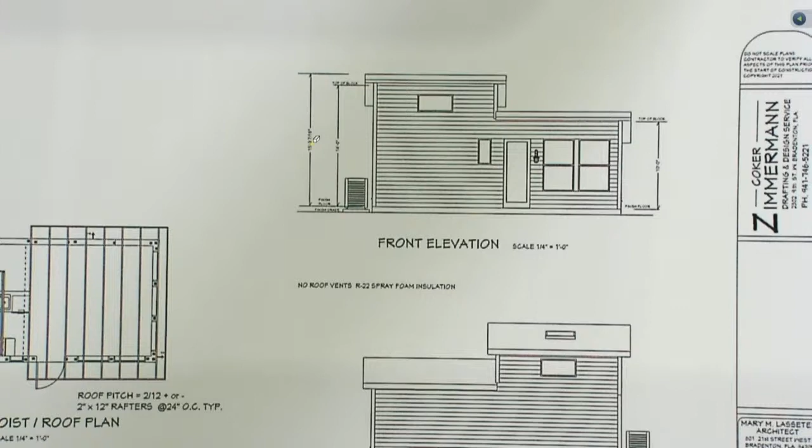Then in this line drawing, you have full height windows, those two on the right-hand side, full height with clerestories above them. I'm not understanding that. So right now you're showing us 1/1 windows for the two windows here? Correct. Now if we go back to the rendering... I see, they're full height windows that go all the way down to the slab, and then they've got the clerestory window on top.

This was probably more of a decorative look, but code-wise we have to have 3 foot by 6 foot windows, and that's what I have here as far as product codes, so these are the ones we're going to use. So the rendering's not accurate? Just a little off. But they're not full height, like, see how that goes almost down to the slab? No, they're just like these here. And there's no window above? No, they're just solid windows.

Okay, so we're kind of meshing two sets of drawings together. Right, windows are important to us, that's why I want to make sure. When we originally did this design, we thought we might be able to go this way, but obviously we have to go with the Florida code, which requires a 3x6 window giving a 5.7 square foot opening for egress.

So that's only for bedrooms, right? That's only for bedrooms. We left it in the home because there's no way to get out of the bedroom, kind of per se. It's a loft, you're talking about the windows upstairs now? Right, there's only one fixed window upstairs, so the rest of them we wanted as egress windows. I mean, you have a door. Yeah.

Okay, so I think there are two different options here. We'll work with staff on getting that finalized. I think the two upper level windows, I'm okay with them being off center, tilted to the side for the loft. This doesn't look as visually appealing as the window in the middle compared to the side, just the way we envision the building looking. And I'm okay with that, I just think it's better on the backside.